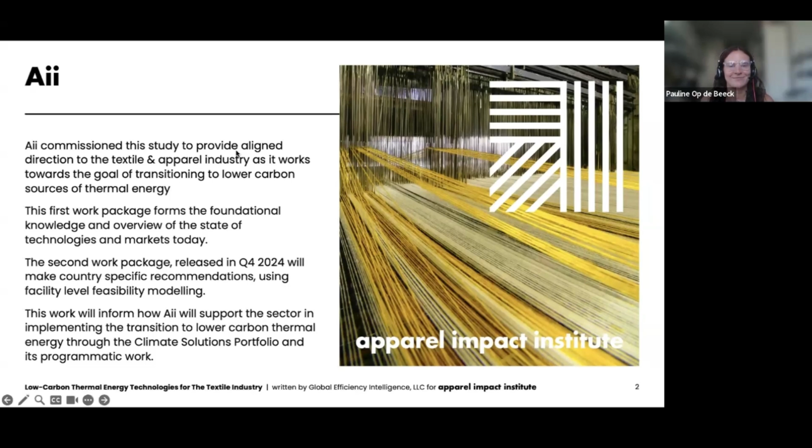So yeah, we're very excited to share this report with you today, and also incredibly looking forward to the implementation work that will come out of it. So over to you, Ali. Great. Thanks, Pauline. So with that background, let's discuss the content of this report.

So we are going to very briefly talk about the scope and also fairly briefly about some of the barriers and the drivers for low carbon thermal energy for textile industry. In this report, we cover 6 what we call alternative low carbon energy sources and technologies. Energy sources like biomass, solar thermal, natural gas, and technologies, for example, electrification technologies.

We looked at 3 electrification technologies: electric boilers, industrial heat pump, mainly what we mean is high temperature steam generating heat pump, and also thermal energy storage, basically heat batteries. So these 6 technologies are included in the assessment. Of course, natural gas is not really low carbon, but compared to coal, if the methane emission is managed well, it could be lower carbon. So there are some nuances that we will get into.

We have a technology comparison matrix that we will present later, comparing all these technologies with respect to certain indicators, the pros and cons, and how they rank across those indicators, and a very brief recommendation. Hopefully we won't run out of time.

Just briefly, I already introduced Global Efficiency Intelligence, but also just to let you know, we did launch a platform called Textile Sustainability Hub some 5 years ago. It is meant to be a platform where we research and share information on decarbonization of textile industry, similar content like what we published today. So if you're interested, please check that website. You will find much more information, publications, and tools for decarbonizing textile industry.

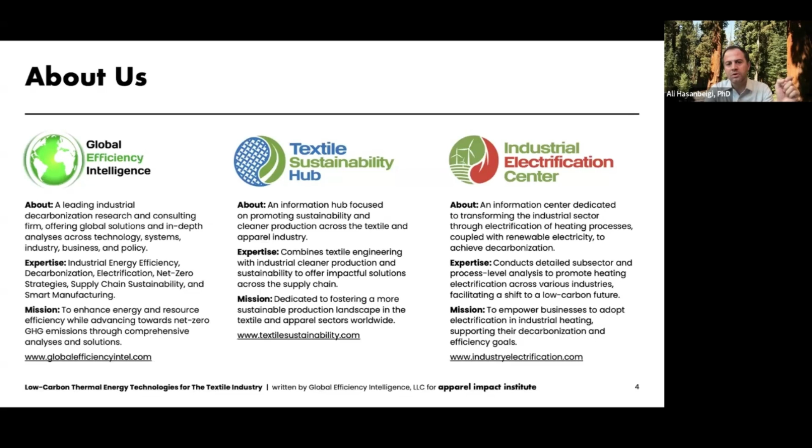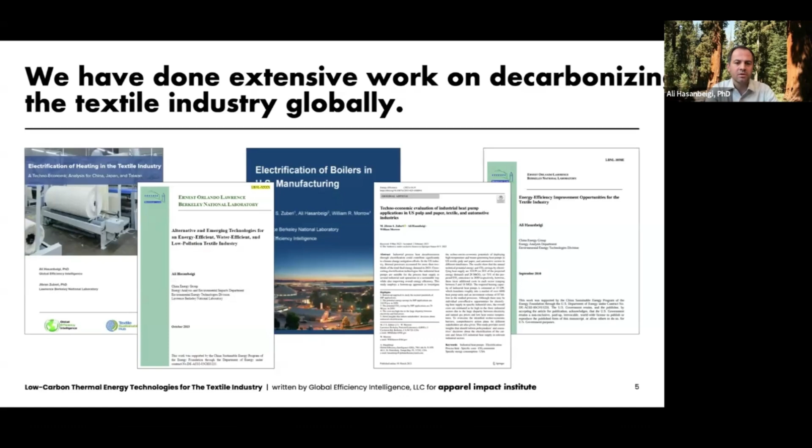As I said, we do have textile engineering background, and we have done a fair amount of work on textile industry decarbonization. The last work we did that was published was electrification of heating in textile industry. In the past couple of years, actually, we have been working with a number of brands, some of you are here already, and their suppliers mainly in Southeast Asia, East Asia and South Asia. And we have been conducting pre-feasibility analysis for deep decarbonization or electrification of heating in some of these facilities. So facility level feasibility studies. Some of those works, because they're at the facility level, are not published yet.

On the topic of electrification, which is half of the technologies we are discussing, we have been doing a lot of work, especially in the past 6 years or so, and the work covers many different industries, not only textile industry, so we can really tap into all the diverse knowledge we gain there, and also across different countries. I started with the US, then we did work on China.

As we speak, we are finalizing and hopefully will publish reports on Europe and India on electrification of heating in those countries. But back to textile, I think for this group, I don't need to mention, the textile industry accounts for about 2% of global GHG emissions. Some estimates say a bit higher, depending on where you draw the boundary.

So as you know, we use electricity and heat in a textile plant. When we look at the textile industry, often we look at what we call a typical plant, the plants that do have wet processing. So we are not talking about just the simpler plant that's just doing the sewing. So textile manufacturing, where a fair amount of heat is consumed.

So on the electricity side, if the suppliers or a textile plant are located in countries where renewable procurement for corporates is available through power purchase agreements and other mechanisms, then decarbonizing electricity is, I would say, a low-hanging fruit. Fortunately, in many geographies, including in Asia, that's happening. If you go to China and India, in many locations there would not be a problem having corporate renewable procurement now.

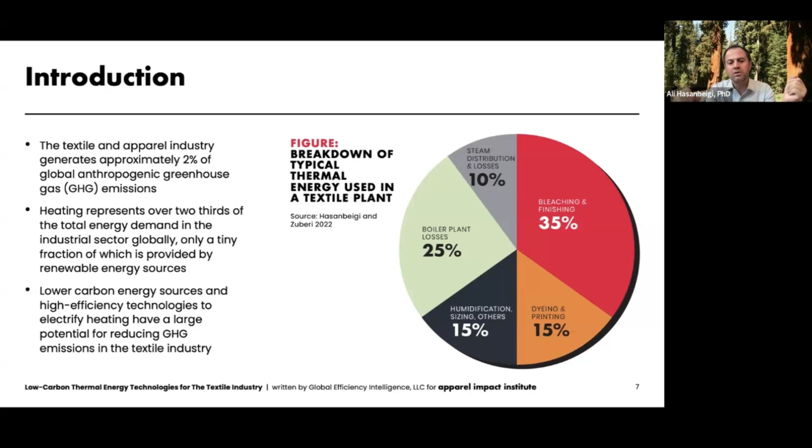Fortunately, the textile industry is what we call a low temperature industry, because, as I mentioned, we are doing work across different industry sectors, compared to, let's say, steel, cement, chemicals, where you have all these high temperature processes. In the textile industry, almost all of the processes require temperatures below 200 degrees C, and many of them below 100 degrees C.

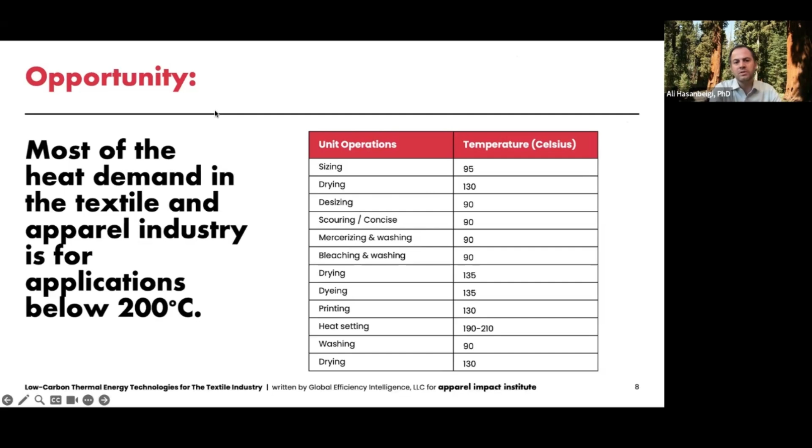Steam is used in many of these, in some cases hot oil. But overall, when you have these lower temperatures, compared to high temperature, it's relatively easier to decarbonize or electrify or use all these other technological options that we have. So that is something to keep in mind. So that's good news.

So stepping back, just to frame the scope of this, anything you do to decarbonize the industry sector, any industry, falls under 5 major decarbonization levers or pillars. The first one is material efficiency and circular economy and everything related to that. You're all familiar with it. Energy efficiency is the second one, pretty straightforward. The third one is electrification of heating through electric boilers, heat pumps, thermal storage, which we are going to get into in detail. The fourth pillar is what we call low carbon fuels, feedstock, and energy sources. In the context of the textile industry, consider, for example, sustainable biomass, solar thermal, etc.

And the fifth pillar, which is not really applicable to the textile industry, that's why it's not shown as a separate column, is CCUS. Because of the nature of emissions from a textile plant, you really can't apply carbon capture there. So in this report, the technologies we are covering fall under electrification, 3 technologies, and under low carbon fuels, which are sustainable biomass, solar thermal, and natural gas. So these are the 6 technologies under these 2 pillars.

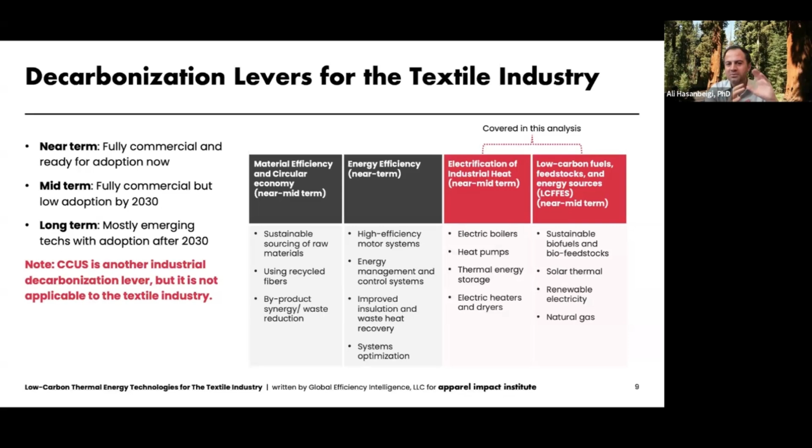We are not saying other pillars are not important. Definitely you should do energy efficiency. Definitely you should do circular economy. But to get to net zero, you do need these technologies we are discussing today, at least some of them, the ones that can actually be implemented and can be impactful. Energy efficiency cannot get you to net zero. Circular economy is definitely on the demand side and needs to be implemented. It has its own challenges. Many people are working on it. But in this report, we focus on these 2 pillars.

So one other thing to mention, because 2 of these alternative technologies or energy sources we are discussing are rather controversial and have nuances. Let's start with natural gas.

Natural gas, if you combust, the emission from combustion is lower than coal. Coal, usually you get emission around 92, 94, 96, depending on type of coal. Natural gas, you get 50 or 55 or 56. So you have higher emission with coal.

However, as you all know, there is now a massive backlash toward natural gas because of this upstream methane emission. And because methane has significantly higher global warming potential, it can result in natural gas actually having higher CO2 equivalent emission per gigajoule of energy than coal. And actually, it's a pretty serious issue that cannot be ignored.

Next, biomass. If it's sustainable, carbon neutrality can be assumed. So basically, almost zero emission. However, if you consider unsustainable biomass, then it is simply worse than coal in terms of CO2 emission. So one of the takeaways from this webinar should be that unsustainable biomass is definitely worse than coal and should be avoided at all cost.

Simply go to the IPCC greenhouse gas inventory. There's a guideline, there's a table there, and look at the CO2 emission factor of the fuels. Biomass, almost all of them have a higher CO2 emission factor than coal. Actually, many of them are above 100.

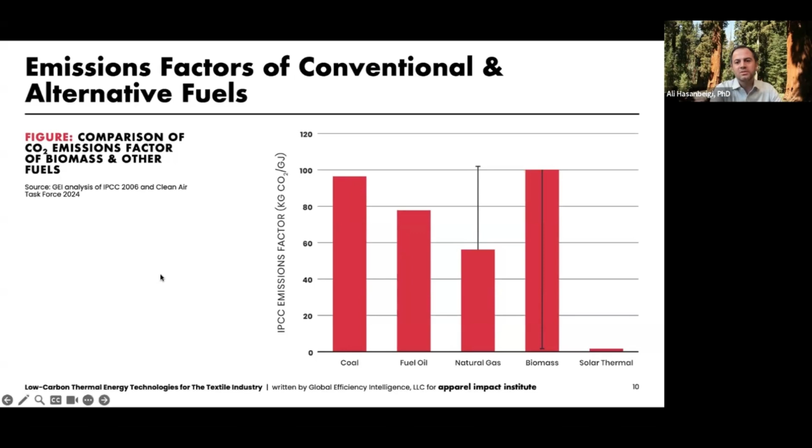So not only will burning biomass emit more CO2 than coal, it has all the damages to the ecosystem, biodiversity, food versus fuel, etc., if it is unsustainable. We are not saying all biomass is bad. Sustainable biomass from sustainable agricultural waste is fine. So that's another thing to keep in mind. Of course, solar thermal is just solar energy, so no emission associated with that.

So very quickly, we have a quick look at some of the barriers and drivers when we talk about low carbon thermal energy technologies for the textile industry. First, with the barriers, I won't get into detail, but from what we have seen and all the work we are doing firsthand with brands, suppliers and textile companies, there is definitely a lack of knowledge and need for education and capacity building with regards to some of the technologies, for example, electrification. People simply are not aware of this.

The capital cost of some of these technologies is high, not for all of them, for some of them. The financing of it is a challenge. The textile industry is mostly SMEs, and even for medium size, having access to financing is a challenge, especially in developing countries. There is limited supply of some of these alternative energy sources. For example, sustainable biomass is limited. Natural gas, many of the textile producing countries don't have it, assuming natural gas is a reasonable option.

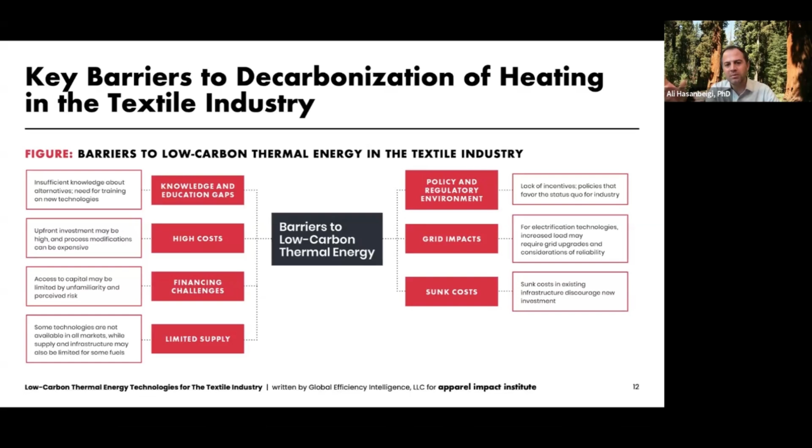The policy and regulatory environment in some of the countries is not favorable, for example, having policies that allow for PPAs, corporate renewable procurement, and those kinds of things. The grid is not clean in many of these countries in Asia, and that is a barrier for electrification, for example. And the equipment is already in place, there's a sunk cost, and replacing it means you're depreciating the existing equipment, and that has cost implications. So these are some of the key barriers, kind of a snapshot.

However, there are also drivers. What's driving? We see things are happening slowly. If some of the brands are on the call, I'm sure you are working on it already. The climate policy, both at the country level and company level, we have all these net zero targets and the drive, some countries more, some countries less. But already there is this push from the highest level to decarbonize.

The energy costs, renewable energy costs are dropping, some of these technologies' costs are dropping, and that is good news. Some of the things we are hearing weren't there 5 years ago. Things are really changing. Technological readiness: again, when we talk about thermal energy storage and electrification technologies, 10 years ago a steam generating heat pump was really nascent. But now, as we speak, they are implementing them.

So they are available. We have been talking to steam generating heat pump manufacturers. Just 2 days ago, I talked to a startup in India manufacturing a steam generating heat pump. And of course, in the US, Europe, Japan, and other markets, there are many of them. There is also the energy security aspect.

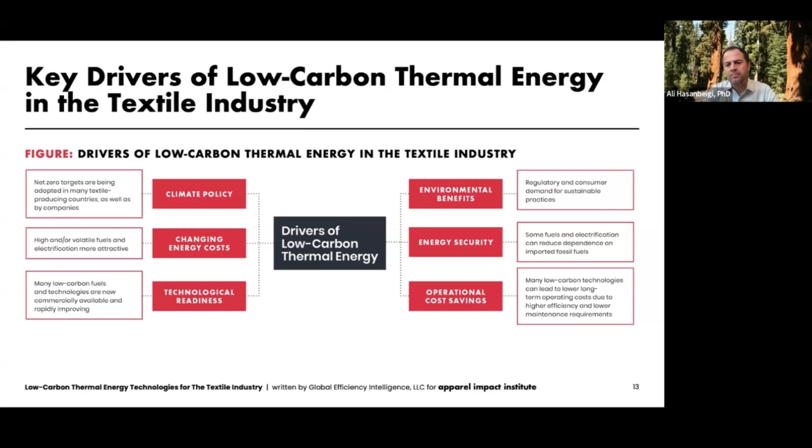We saw what happened with the Russian invasion of Ukraine, what happened in Europe, also in India and China, huge concern about energy security, and they have local renewables, so that's a drive in itself, and other aspects that I don't need to get into detail.

So I think I already mentioned this. What we are covering, we are going to go through every single one of these alternative low carbon thermal energy technologies and give you a snapshot of each technology, and also the assessment we have done for 20 major textile producing countries in terms of ranking them with regards to the readiness that they have for each of these technologies: biomass, solar thermal, electrification technologies (3 of them: electric boiler, industrial heat pump, thermal storage), and natural gas.

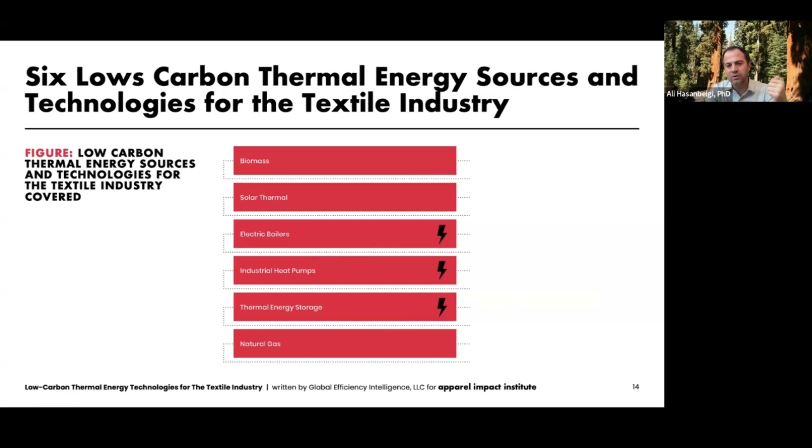And with that, I would like to turn it to my colleague, Cecilia, to talk about biomass. Cecilia? Great, thanks, Ali. Next slide, please.

So the first of the 6 low carbon energy sources and technologies that we evaluated was biomass, looking at biomass use in boilers. Biomass-fired boilers are capable of providing low and medium temperature steam for the textile industry. It's an established technology, and it's also increasingly a fuel source of interest for the textile industry, with rapid adoption in many places in the last few years. Biomass includes the categories of energy crops, waste biomass, agricultural residues, and forestry products. Here we're largely focusing on agricultural residues as the biomass source with the largest potential for sustainable sourcing.

Ali mentioned earlier that biomass has a higher emissions factor than coal when combusted. Carbon neutral biomass refers to biomass that sequesters as much carbon as it releases during the combustion process and does not harm local ecosystems. So when we talk about sustainable biomass, which our evaluation is focused on, we're looking at biomass that has been sourced with a lot of these considerations in mind and is carbon neutral. This is highly dependent on the local context and how the biomass is produced, transported, and processed.

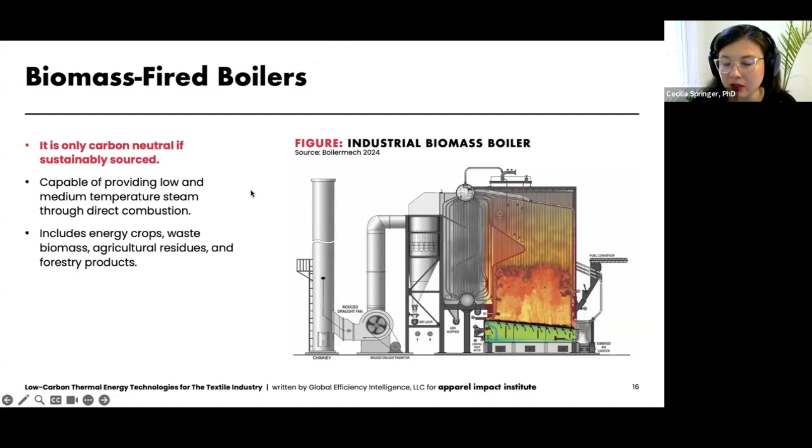Next slide, please. So for each of the 6 energy sources and technologies, we analyzed their strengths and opportunities, their challenges, the available supply and infrastructure, as well as the cost. As we go through this presentation, you'll see this same diagram for each of the 6 technologies and energy sources. For biomass, some of the strengths and opportunities are that it's a mature technology, it can take advantage of existing waste, and it has the potential for carbon neutrality.

However, the biggest challenge we want to highlight here is that it's highly dependent on whether or not biomass can be sourced from sustainable origins. There are many challenges in doing so, including competition with other uses of land, especially if it's associated with land use change. There is scientific debate about the carbon neutrality of different sources of biomass, so in general it's an area for a high amount of caution.

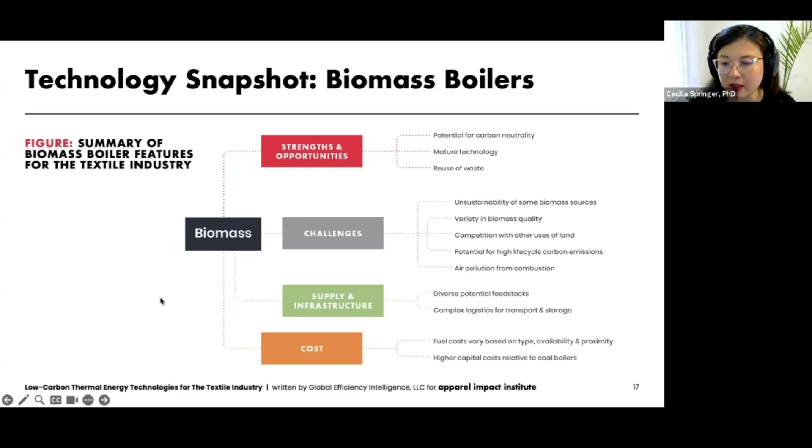There are also other challenges with regards to an individual textile facility being able to handle diverse potential feedstocks. There may be complex logistics for transport and storage, and fuel costs are highly dependent on local supply, as well as the higher capital cost of biomass boilers relative to coal boilers. Next slide, please.

So for each of the 6 energy sources and technologies, we also did a country readiness assessment, looking at the 20 major textile producing countries around the world and assessing each energy source or technology on a number of different indicators. We then used these indicators to create a ranking and scoring system, sorting each of the 20 countries into buckets: most ready to adopt the given energy source or technology, moderately ready, or less ready without support. This is regarding adoption in the near term, and countries that are less ready would require a longer time frame or more support to adopt these technologies for heating in the textile industry.

So when it came to evaluating sustainable biomass in particular, we looked at country readiness in terms of a couple of metrics. These include the availability of biomass supply chains and infrastructure, the share of biofuels and waste in a country's total energy supply as a proxy of availability, and a metric on agricultural production of crops whose residues are typically used for biomass in each country, among several other metrics. Based on these indicators, we created a composite score, combining quantitative and qualitative assessment.

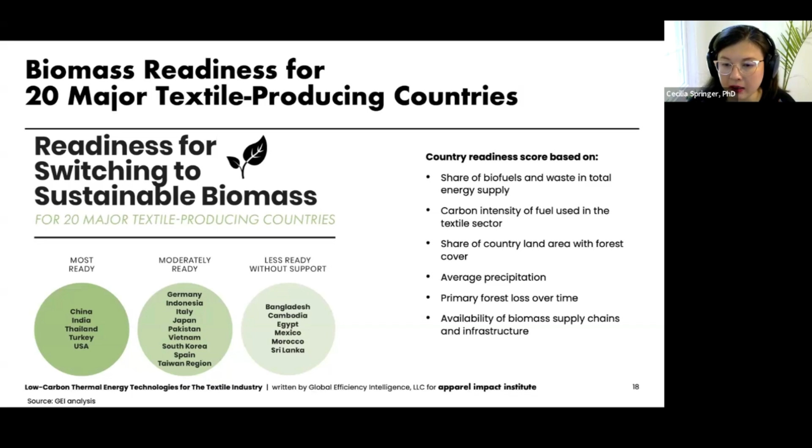Thanks, Cecilia. Just a quick note, for example, some of you who are familiar see Vietnam as moderate and Sri Lanka as less ready, and you might be surprised. Again, we are not ranking based on availability of biomass or what's happening, especially for Vietnam and Sri Lanka, where already too much biomass is happening. Based on our assessment, we are not recommending any more biomass there. It's just that already a good portion of it is unsustainable as well.

So this is not saying there is biomass and you should go use it. This is assessing based on different criteria and saying some of the places where, with all the consideration, there could be some sustainable biomass exploration. But some of the countries already with high use of biomass may not rank well because there's already too much there, and we think limited additional potential exists.

If you're an apparel brand and your supplier comes and says they have switched to biomass, basically it's more bad news than good news. Based on everything we are learning from industry in Southeast Asia and South Asia in the textile industry, there is a good amount of unsustainable biomass being used. And even if your suppliers, through some verification method and standard, say that they are using sustainable biomass, they are taking sustainable biomass from a limited supply. So somebody is going to go after the unsustainable biomass.

Unfortunately, some large apparel brands set in place a very aggressive target for coal phase out, and then they went to the Asian countries and pushed them towards biomass. And that gave a very inappropriate signal to the textile industry in those countries that biomass is the solution. And if you go to some of these countries, for example Vietnam, every single textile producer is switching to biomass. Where is all this biomass coming from?

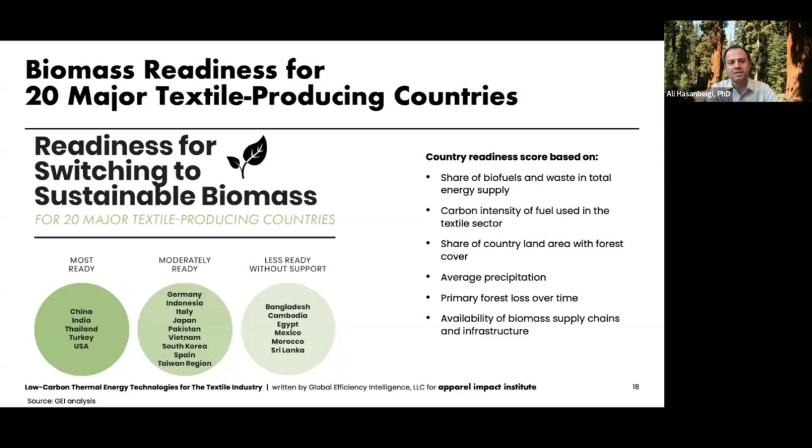Great. So the next technology that we all evaluated was solar thermal technology. Next slide, please. And here we give a brief description of the technology.

There are two main technologies to harvest solar energy: solar photovoltaics, PV, which is much more well known, and solar thermal technology to generate heat. Here we're focusing on applications of solar thermal for industrial heating. Currently, solar thermal technologies account for less than 1% of global heat demand.

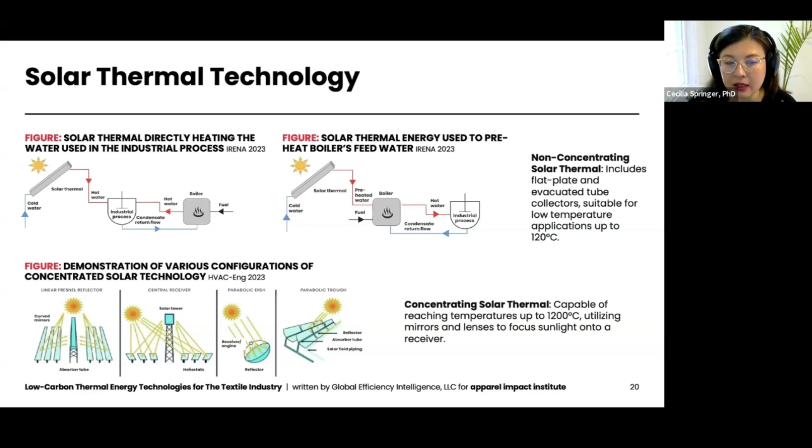There are two main categories of solar thermal technologies pictured here: non-concentrating solar thermal and concentrating solar thermal. The primary difference is the temperatures they can achieve, with non-concentrating solar thermal providing heat up to around 100-120 degrees Celsius, and concentrating solar thermal potentially going much higher. We're primarily focusing on the former, the non-concentrating, today. Next slide, please.

Here's our technology snapshot for solar thermal, summarizing a number of its characteristics. We just want to emphasize that the largest potential advantage of solar thermal technologies is being a zero emissions heating technology using energy from the sun. There are some other potential advantages, such as once it's set up, fuel costs and energy security benefit from taking advantage of locally available solar resources.

However, the key challenge for solar thermal technologies is that it's less suitable for producing steam for industrial applications, and it commonly only produces hot water for industries. Textile processes often require steam to deliver heat, as well as maintain temperatures at a certain level. Producing steam in the temperature range needed for the textile industry requires a significant amount of energy. For a thermal technology, 90% of the energy used to produce steam is just from turning water into steam, the vaporization, whereas only 10% is used for heating the water.

So if you're applying solar thermal, there aren't actually that many potential efficiency gains from just producing hot water. Relative to some of the other technologies that we're profiling, solar thermal is not necessarily an effective way to reduce energy use and emissions in the textile industry, other than perhaps some case applications. Next slide, please.

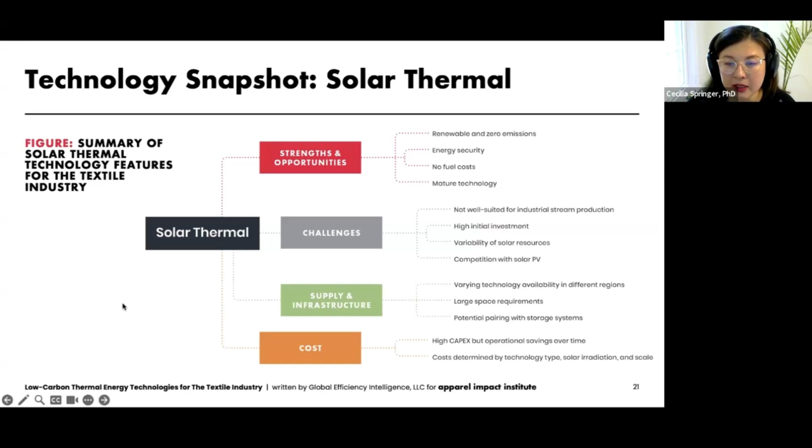And so we also did our country readiness assessment for solar thermal technologies, looking at its readiness across the 20 major textile producing countries that we analyzed.

In this case, the readiness score was based on a composite of indicators, including solar irradiation and solar resources generally available at the country level, the carbon intensity of fuel used in the textile sector. For example, those countries with the highest carbon intensity can lead to the greatest emissions reductions by switching. We also looked at climate policy ambition level and the general regulatory frameworks to support these low carbon technologies, solar technologies, as well as general availability.

And again, we sorted them into the buckets of most ready, moderately ready, less ready without support. And you can see some of the most ready countries here, such as China, India, Italy, Morocco, Spain, etc. They have abundant solar resources and strong policy frameworks, and major potential benefits from switching.

I'll turn it back to Ali for any further remarks on solar thermal and then moving into the next category of technologies.

Thanks, Cecilia. I think you covered everything. So solar thermal for industry, for the textile industry, is rather suitable for niche application. Like you could apply solar thermal, produce hot water, save some energy, but we are interested to get to net zero, deep decarbonization. For that, basically it's not a suitable technology. Basically, it's not an option.

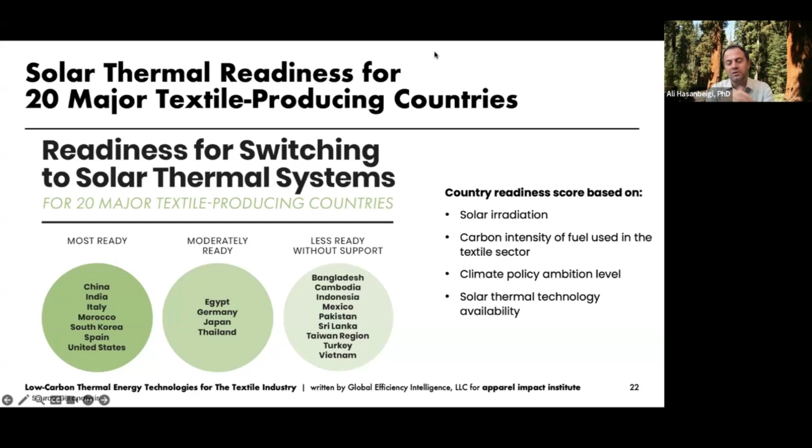Large scale solar thermal is just not suitable for, those are the ones that can generate the steam. They are not just suitable for textile plants. Plus, even that is very location specific. What we are talking about is decarbonizing the entire textile industry in China, in Bangladesh, in India, in Vietnam. So it's quite a niche technology with limited potential.

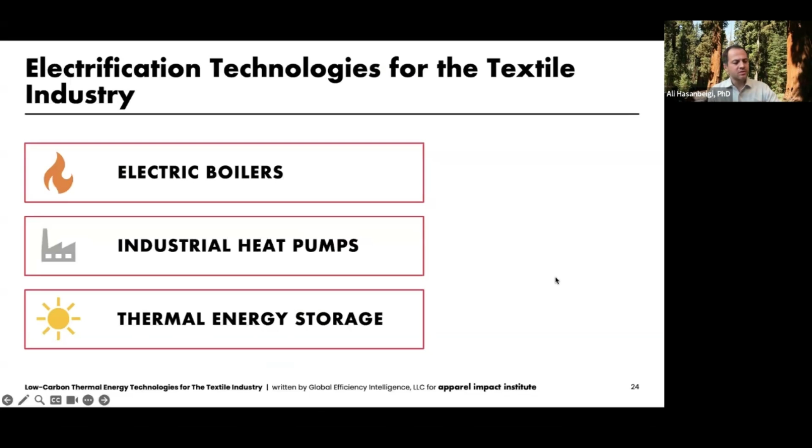So next, electrification of heating. So we have 3 technologies under this. I'm going to go through them. I have to be rather quick, being mindful of time.

But let's talk about electric boilers. Electric boilers have been around for decades. They're not new. You can go buy them today, you could buy them 10 years ago. One myth out there that people have been asking and I've been answering over and over: people think electric boilers are for small scale, residential, commercial, and not suitable for industry. That is simply inaccurate. We have electric boilers suitable for massive chemical industry, let alone the textile industry. For textile industry it's more than enough in terms of size.

There are 2 types of boiler. One is electric resistance boiler up to 5 megawatts. Even that is already enough for textile industry - you can just put 2-3 of them depending on your load. And then you can have significantly larger electric boilers, called electrode boilers, with different technologies. They have been commercial also for a long time.

So the conventional boilers, the steam combustion boilers, typically have efficiency of 70 to 80%, depending on various factors like fuel conditions, etc. But electric boilers can give you basically 99% efficiency. So they're very efficient, and that saving will help. They have been commercial for a long time.

If you install an electric boiler and tie that with renewable electricity supply, if it's 100% renewable, then there you go, net zero immediately. But you don't even need zero carbon electricity to get a CO2 emission reduction benefit compared to fossil fuel, either coal or natural gas - there is a threshold depending on technology. For example, with an electric boiler, if your electricity supply has a CO2 emission factor of, let's say, 200-250 kilograms CO2 per megawatt-hour, then you are set. You will have lower emissions to generate the steam compared to a coal boiler. So you don't have to be zero.

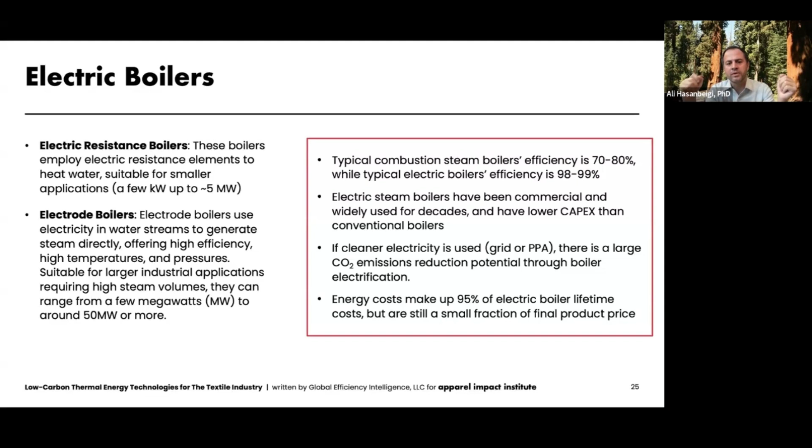So the strength is high efficiency, tied to renewable it can give you low carbon. The challenge is high electricity cost.

Actually, one other thing, the strength, is that the capital cost of an electric boiler is significantly lower than a coal boiler. But again, the capex is not really an issue when it comes to boilers. Most, like 95%, of lifetime cost is the OpEx, the energy cost. So that's what we need to focus on.

For electric boiler financing, you need to look into OpEx financing, which is another challenge. Most of the financing schemes out there are CapEx financing for capital costs. But again, electric boilers are cheaper than conventional boilers, so you don't really need much CapEx financing. You need something to cover the additional operation, electricity, energy cost that comes with it.

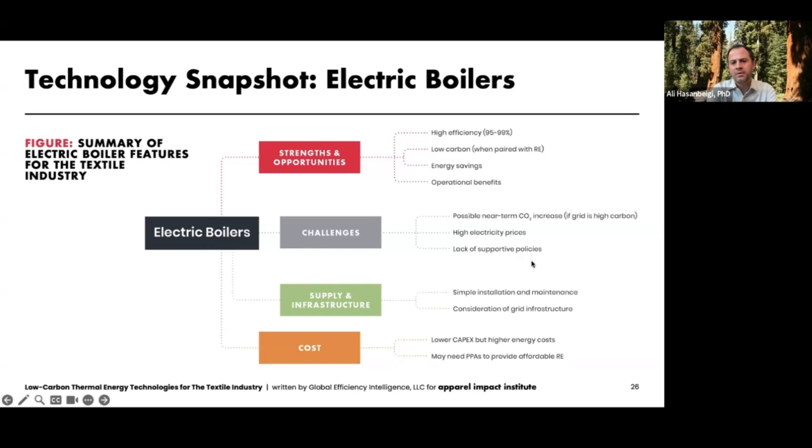I'm going quick just to give you a snapshot. We have around 10 pages for each of these technologies in the report, so you can find much more about them there.

So next is the heat pump. Very interesting heat pump technology. Heat pumps are extremely efficient technologies, and they don't generate heat - they basically move heat. How they work: they get heat from a heat source at a certain temperature, and then use electricity to lift it from this heat source to what we call a heat sink at a higher temperature. Because they're basically moving heat, they can be extremely efficient.

The efficiency of them is measured with something called coefficient of performance. You can have an industrial heat pump with a COP of like 6, 5, or even 7 - that's like 500, 600% efficiency. Those are for lower temperature heat pumps with a small, like 10, 20 degree heat lift.

For what we're interested in, for the textile industry, a steam generating heat pump, high temperature heat pump - for that, usually you use waste heat, usually available at 50 to 60 degrees C at textile industry, and then you lift it to steam of, let's say, 120 to 150 degrees C. Because the lift is significant, your COP will be around 2, 2.5, which is still significant - that's 200% efficiency, so to speak.

And because they have this extreme energy efficiency, it significantly helps reduce the operational cost, energy cost, compared to conventional boilers. But the challenge is heat pumps are CapEx intensive - they are costlier. So for heat pump financing, you need to look for CapEx financing.

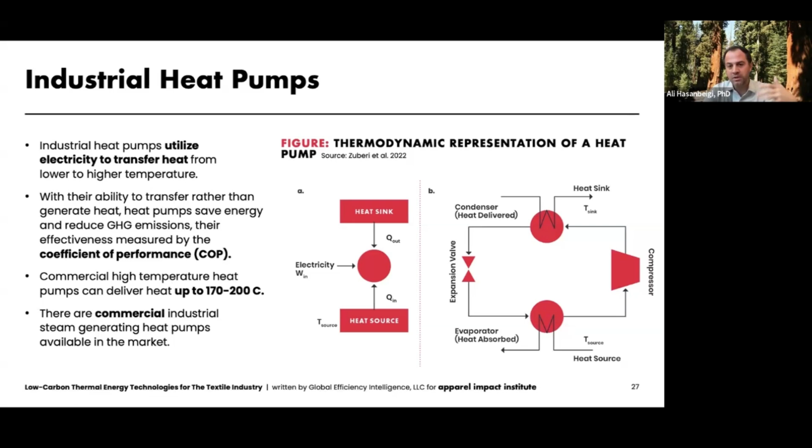By the way, they are commercial - you can go buy steam generating heat pumps, many suppliers already, but not in every single country. Mainly in Europe, US, Japan, and some other countries. In China and India, as we speak, they are developing more and more high temperature heat pumps.

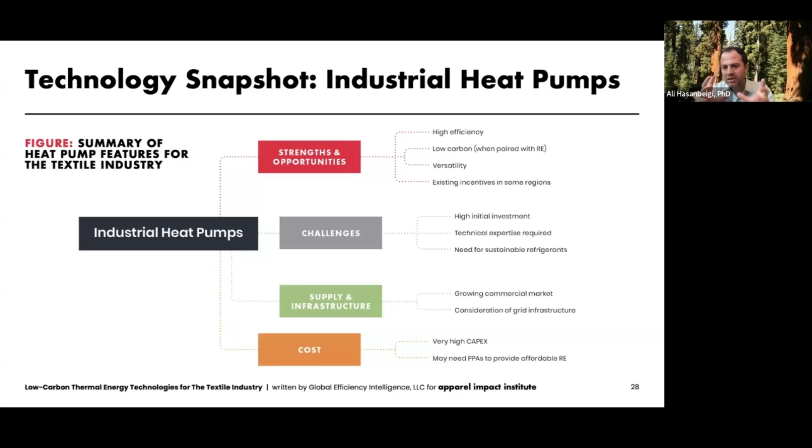I think I already spoke about these challenges and strengths. Once you have the heat pump, because of this significant efficiency gain, you can have electricity supply with even a higher CO2 emission factor, because it uses significantly lower amounts of energy - it will still give you emission reduction compared to, let's say, a coal boiler. So that's another advantage that heat pumps give you - you can use dirtier electricity and still get lower CO2 emissions. But again, the biggest challenge here is the capex.

The next electrification technology is thermal energy storage, basically heat batteries. There are different types of thermal energy storage systems. The most common one is sensible heat storage, but we also have latent heat storage and thermochemical storage. Sensible heat storage basically works by getting renewable electricity - that's the whole intention - and storing it in a certain medium.

The system can be even one package, so they're most suitable to use low-cost renewable. In certain markets, we have renewable curtailment - you can even get negative cost renewable. Store it cheaply, and then throughout the day you use this heat that is stored in your process for steam generation, very straightforward for the textile industry.

There are a significant number of commercial companies that have come up in the past 5 years. They are installing this as we speak. We have talked to a number of them. So these are not upcoming technologies, they are, as we speak, done installing this.

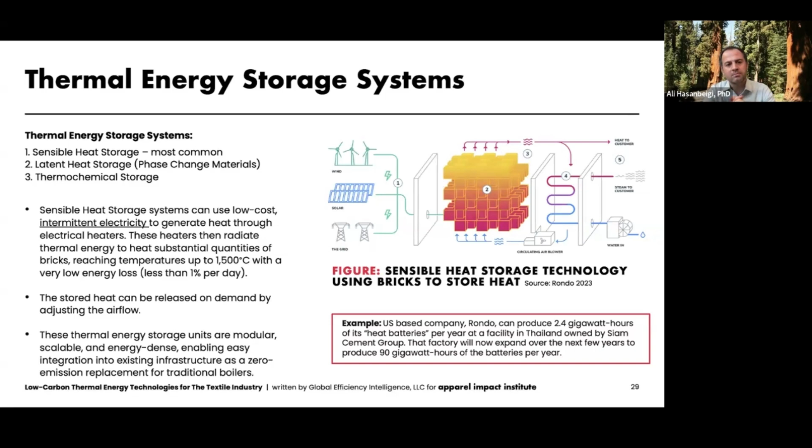It is able to store heat at off-peak, and then give you heat throughout the day with the demand you have, and that will be renewable heat. So you can install a system that takes renewable electricity for just a few hours during the day, 5-6 hours, and then gives you heat for 24 hours.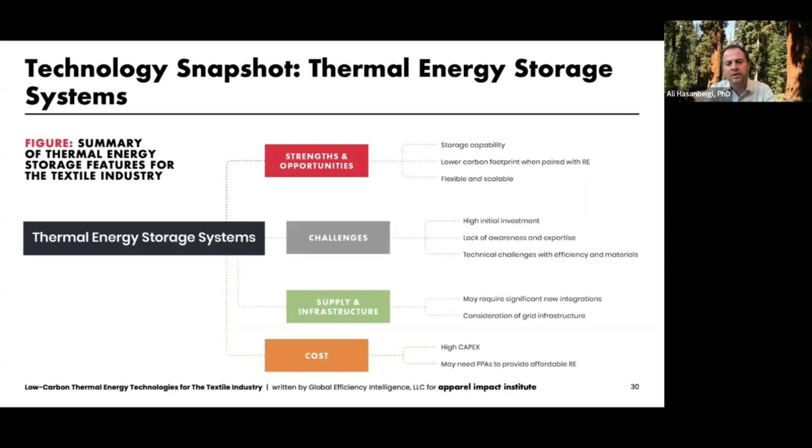The investment cost is high. Currently it's dropping, it's a relatively new technology. I would say many textile companies or suppliers don't even know about or consider these. We actually work with a textile company in Thailand, they were considering this. Of course, it does require renewable electricity supply, and in certain markets it may not be readily available. The capex is a challenge for sure.

So that was a very brief introduction to some of these electrification technologies. Then, like what Cecilia presented, we wanted to look at the readiness of countries for the overall electrification of heating, not just for one technology.

We looked at a number of criteria. This is not the readiness for electrification, this is just a PPA, power purchase agreement, ranking in different countries based on the PPA index that was published. In some countries, of course the US, many European countries, but also a number of Asian countries, namely India and China, there is very advanced, versatile corporate renewable procurement, including PPA.

So textile companies will be able to do PPAs and procure renewable energy in order to use it either for electricity supply or for heat supply. So that's good news.

Some of the countries, Bangladesh, Cambodia, Indonesia, Pakistan, Sri Lanka, are really lacking at the moment. Things are changing, they have all the plans, but at this very moment they're definitely behind, and they do need more support in that regard.

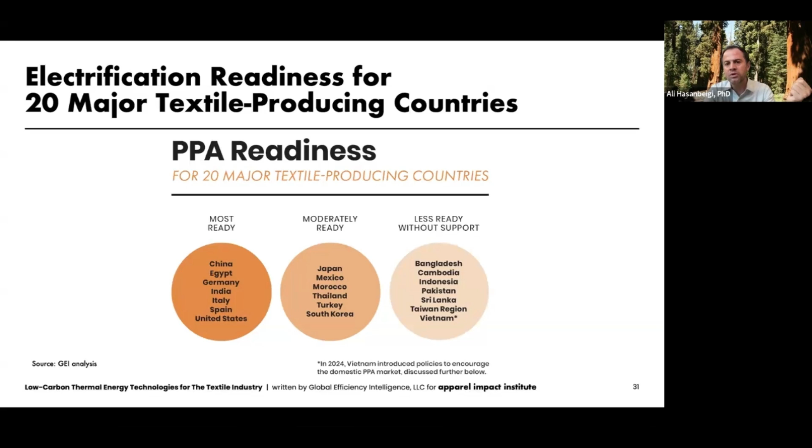We looked at other options or indicators like the share of clean electricity in total electricity generation in different countries. Among these 20 major textile producing countries, like Spain, Sri Lanka, Germany, Cambodia, Vietnam, some have a higher share, and some countries have a lower share.

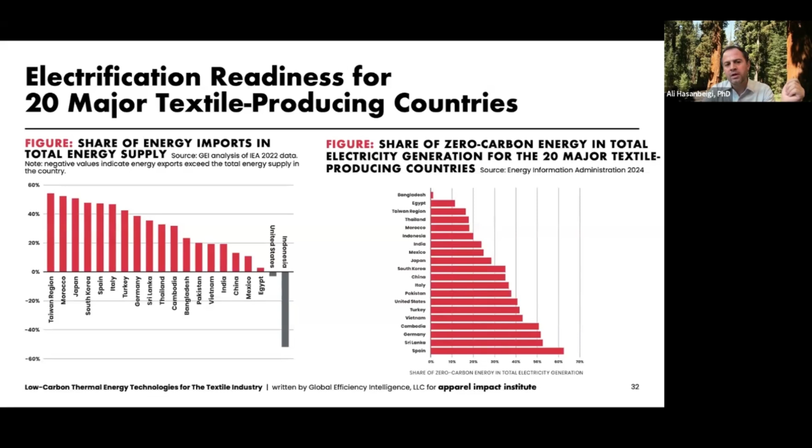So looking at the range of these criteria, we came up with a kind of weighted average to rank countries based on their readiness for electrification of heating in the textile industry. The criteria are listed here, and you have a detailed explanation and data for each of those in the report.

So some of the countries, no surprise, some of the European countries, Germany, Spain, Italy, they have very advanced PPA and good renewable access, in the US as well.

So they're most ready. Some of the countries, China, Egypt, India, Sri Lanka, Taiwan, Thailand, Vietnam, are moderately ready. Some more, some less, but we put them in the moderate category.

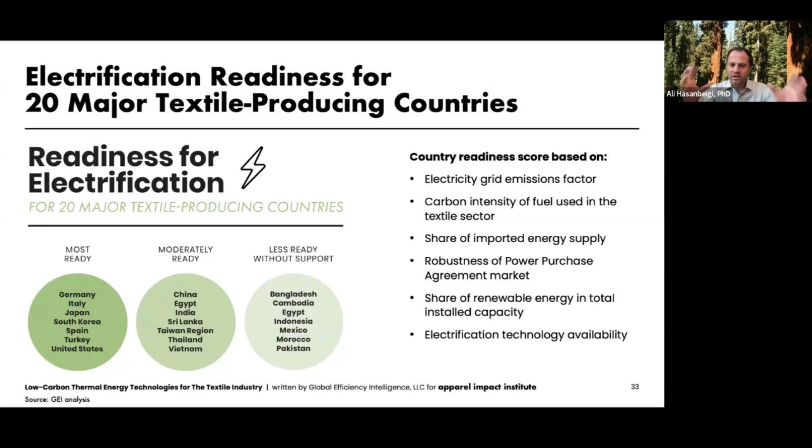And then some countries would definitely need more support. At this moment, they are less ready. But that does not mean that a given textile plant cannot electrify there. For the entire textile industry there to transition, though, they would need more support and need to get more ready.

That was very brief on electrification. I'm going to turn it back to Cecilia to talk about natural gas, and then we'll wrap this up.

But natural gas, again, is not a low carbon technology. It's just lower carbon compared to coal, and that is even conditional. There's a big if, which is the upstream methane emission. So it's really not an option you want to take lightly.

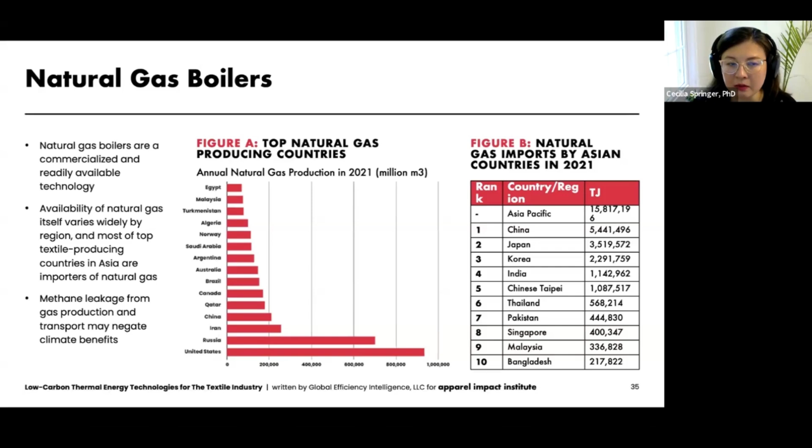Next slide, please. So I think we've talked about natural gas a fair amount already, so I'll just recap. Some of the strengths and opportunities are that it's an established technology. In terms of direct combustion, it is lower emissions than coal in terms of both air pollution as well as greenhouse gas emissions. But if you include the upstream impacts, that is the major challenge for adopting natural gas.

It's not necessarily a lower carbon energy source when you take into account these upstream emissions. And those can vary a lot across countries based on their ability to detect and monitor leaks and mitigate those leaks. There's also challenges in cost and supply. As we've seen with the war in Ukraine, there's a lot of fluctuation in international markets and geopolitics, and there may be some complex logistics for transport and storage and so on.

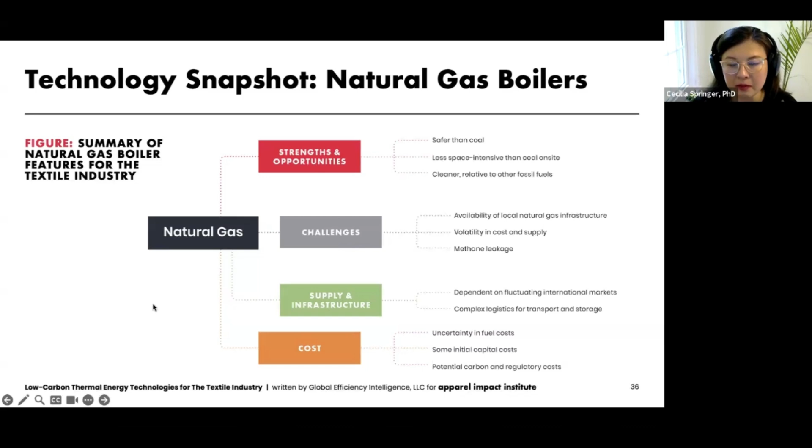Next slide, please. So we did also do the readiness assessment across the top 20 textile producing countries for natural gas. This is not necessarily a recommendation to adopt, but just saying that based on a number of indicators, some of these countries score higher. For example, some have a higher share of natural gas in their total energy supply, potentially indicating local availability. We looked at how much they're dependent on imports, which again can be a major risk point.

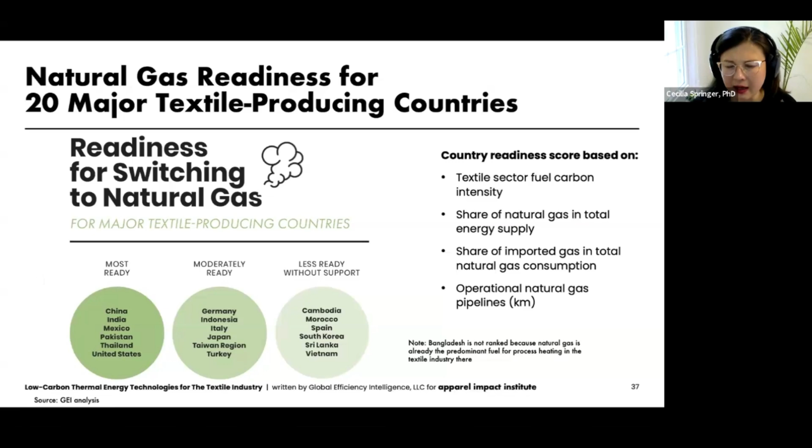And we also looked at pipeline length in each country. Some countries really have no natural gas or very little natural gas pipelines. And at the facility level, if an individual textile facility is not connected to the natural gas grid, it's almost impossible for it to consider this as a lower carbon alternative. And so here we've ranked the most ready countries, moderately ready and less ready. Yeah, and I think we can move on to the next section.

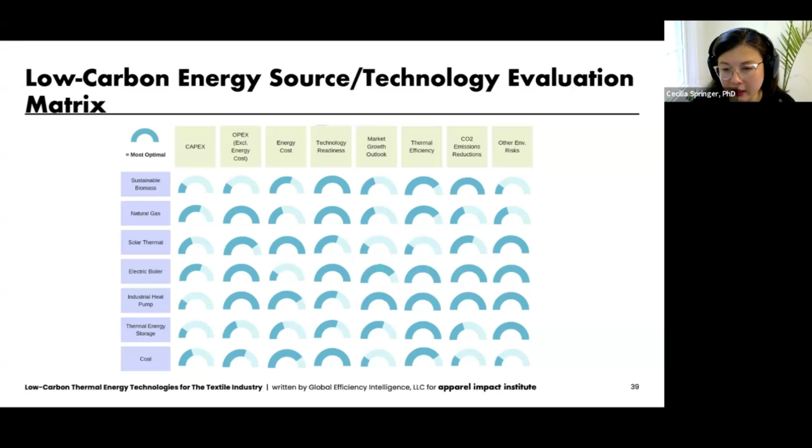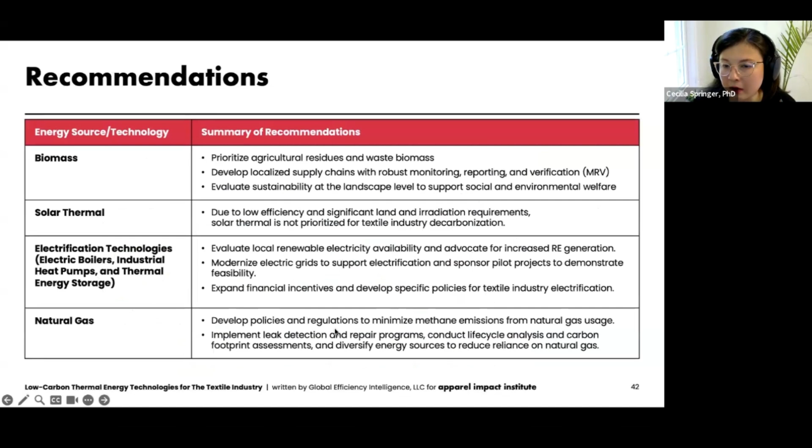And so you can look at this table in more detail in the report, but I just want to highlight that across the indicators, in comparison, electric boilers and industrial heat pumps rank most highly, with many of the scores looking quite optimal in terms of their high market growth outlook, high efficiency, and emissions reduction potential when paired with renewable energy. The next couple of slides are just looking at this information in another way, so I think we can skip through in the interest of time, and I'll pass it to Ali for our final recommendations.

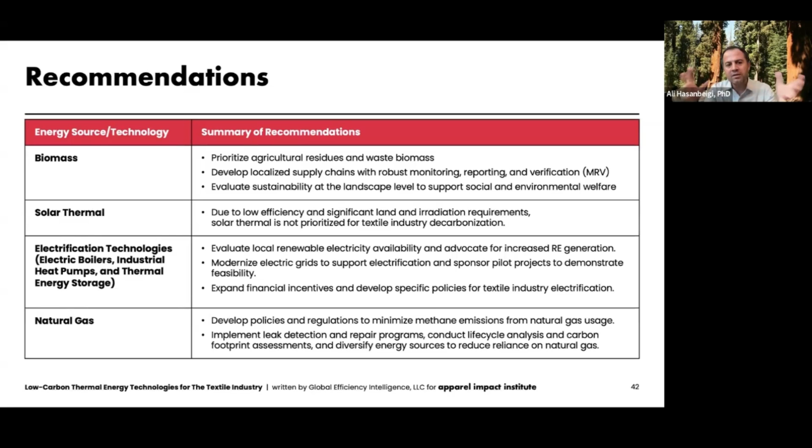So with that, I would like to conclude. Way more information and much more detail is available on the website in the report. So feel free to dive deeper there, and hopefully you'll find the information useful. And in the next report that we'll publish, you will see the numbers in terms of potential CO2 emission reduction and cost for some of these key technologies in 5 major countries.